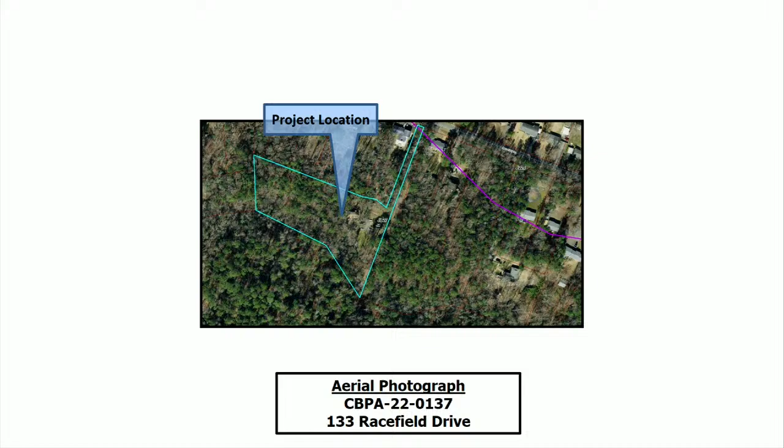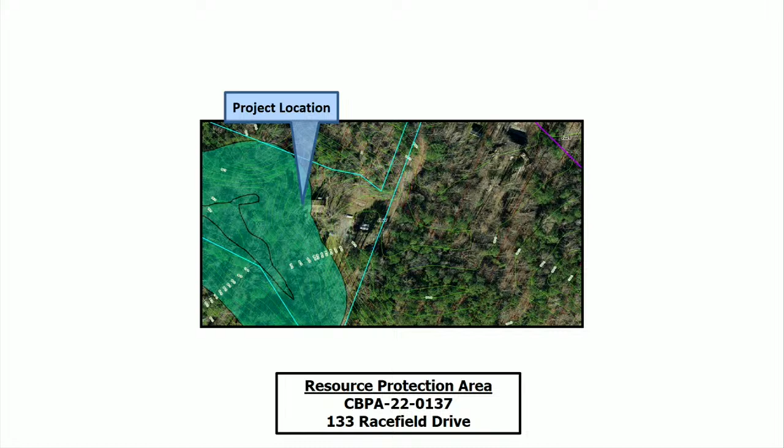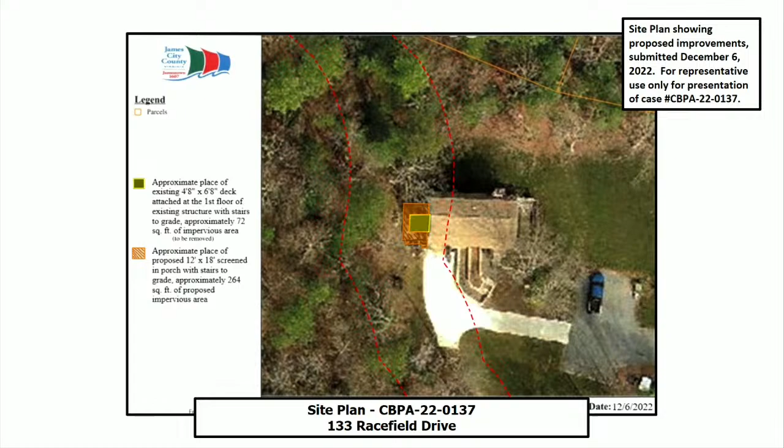The total lot size of this property is 2.91 acres, of which 74% is located within the RPA. The applicants are proposing to remove the existing deck on the side of the home and replace it with a screened-in porch. Here on the site plan, you can see the 100-foot resource protection area.

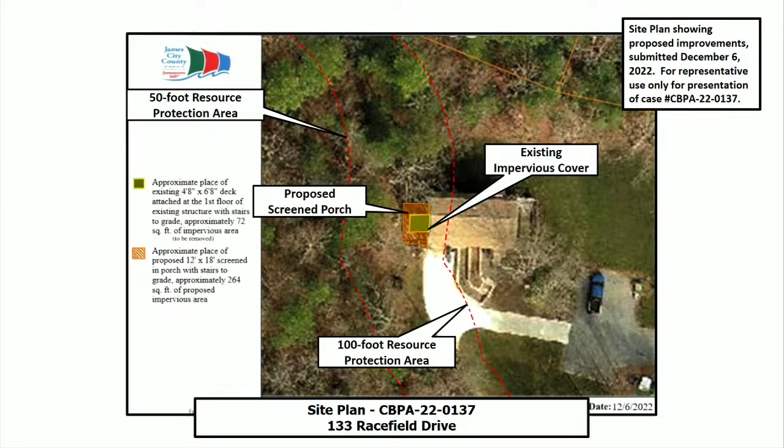The area in yellow is the existing impervious cover, or the existing deck on the property, and the area in orange around it is the proposed screened-in porch. The existing deck is 4 feet 8 inches by 6 feet 8 inches, and the proposed porch is 12 feet by 18 feet. Total existing impervious equals 72 square feet, and the proposed total impervious is 264 square feet. Therefore, total impacts associated with this proposal equate to 192 square feet of impacts to the landward 50-foot RPA. Required mitigation for this amount of impervious impacts equals 8 shrubs.

Staff has evaluated the application and exception request for the replacement of a deck with a screened-in porch. This application meets the ordinance conditions in sections 23-11 and 23-14 and should be heard by the board because the construction of a porch is considered accessory in nature. The board may grant exceptions to section 23-7 if the application meets the following 5 conditions.

The exception request is the minimum necessary to afford relief. Granting the exception will not confer upon the applicants any special privileges denied to other property owners in the vicinity. The exception request will be in harmony with the purpose and intent of Chapter 23 and is not of substantial detriment to water quality. The exception request is not based on conditions or circumstances that are self-created or self-imposed, and reasonable conditions are imposed which will prevent the exception request from causing a degradation of water quality.

Staff has reviewed the application and exception request and has determined the impacts associated with the proposal to be minor for the proposed development.

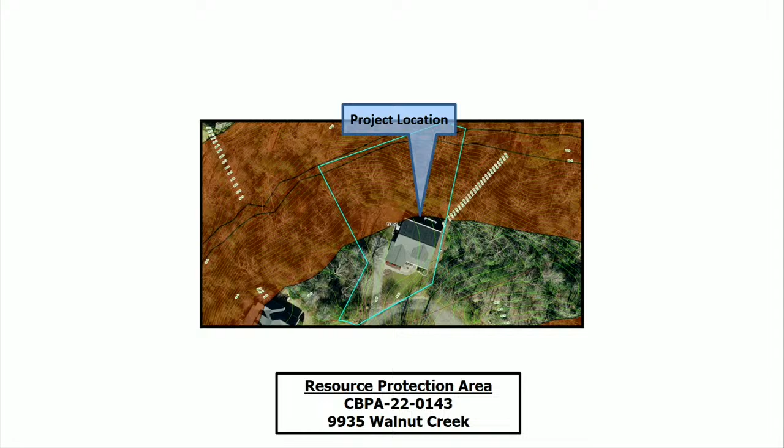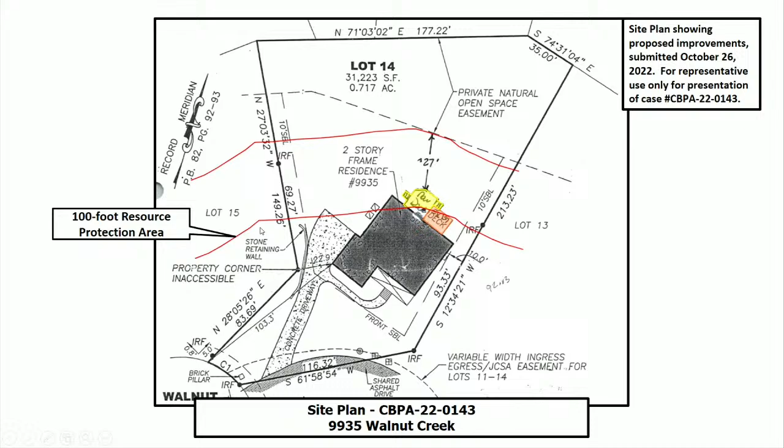This is further shown on the site plan above with the 100-foot resource protection area outlined here in red, the 50-foot resource protection area outlined here, the proposed deck in yellow, and the existing deck, which is proposed to be converted into a screened porch in orange. Required mitigation for this amount of impervious impacts equals 7 shrubs.

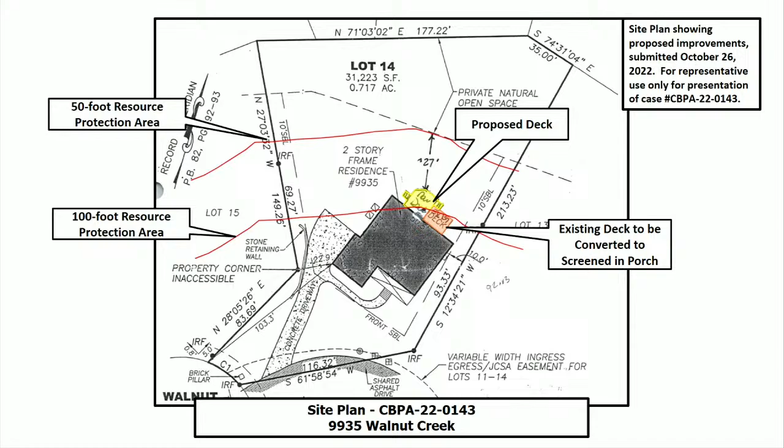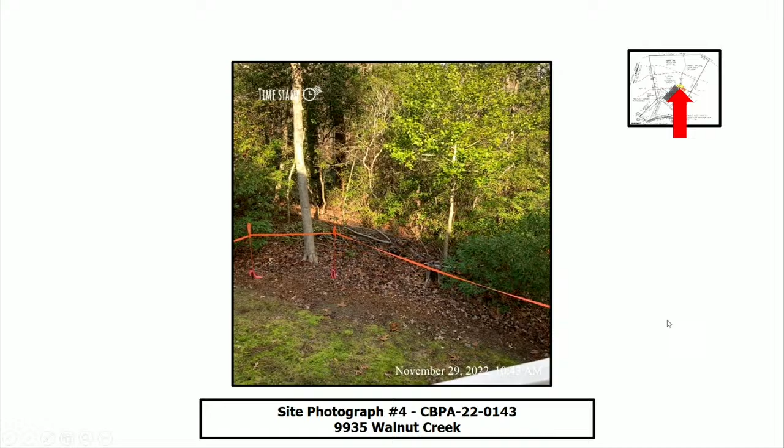Staff has evaluated the application and exception request for the construction of a deck. This application meets the ordinance conditions in sections 23-11 and 23-14 and should be heard by the board because the construction of a deck is considered accessory in nature.

The Board may grant exceptions to section 23-7 if the application meets the following 5 conditions: the exception request is the minimum necessary to afford relief; granting the exception will not confer on the applicant any special privileges denied to other property owners similarly situated in the vicinity; the exception request will be in harmony with the purpose and intent of the Chesapeake Bay Preservation Ordinance and is not of substantial detriment to water quality; and the exception request is not based on conditions or circumstances that are self-created or self-imposed.

Nor does it arise from conditions either permitted or non-conforming that are related to adjacent parcels, and that reasonable and appropriate conditions are imposed which will prevent the exception request from causing a degradation of water quality.

Staff has reviewed the application and exception request and has determined the impacts associated with the proposal to be minor for the proposed development. Staff recommends approval of this exception request.

If the board wishes to approve the request, staff recommends the following conditions be incorporated: that all other necessary federal, state, and local permits required for the project are obtained; that a mitigation plan equating to 7 shrubs be submitted to the Stormwater and Resource Protection Division and approved prior to the project start; that a surety of $500 be submitted in a form acceptable to the James City County Attorney's Office to guarantee these mitigation plantings; and the placement of 3 inches of gravel over filter fabric under the footprint of the deck.

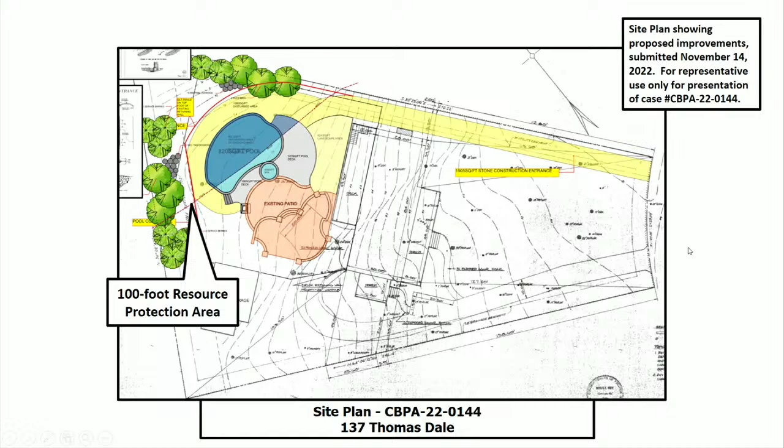This red line is the 100-foot RPA buffer. The darker blue is the area of the proposed pool and a little bit of the proposed pool deck that is within the RPA. The existing patio is shown in orange.

Required mitigation for this amount of impervious impacts equals the planting of 2.5 planting units, which is 2 canopy trees, 4 understory trees, and 9 shrubs. Some of that mitigation has been shown here behind the proposed pool.

I'd also like to clarify that on this site plan, the area of yellow surrounding the pool and coming up the side of the property is shown for the construction entrance and area that may be needed for construction vehicles for the pool.

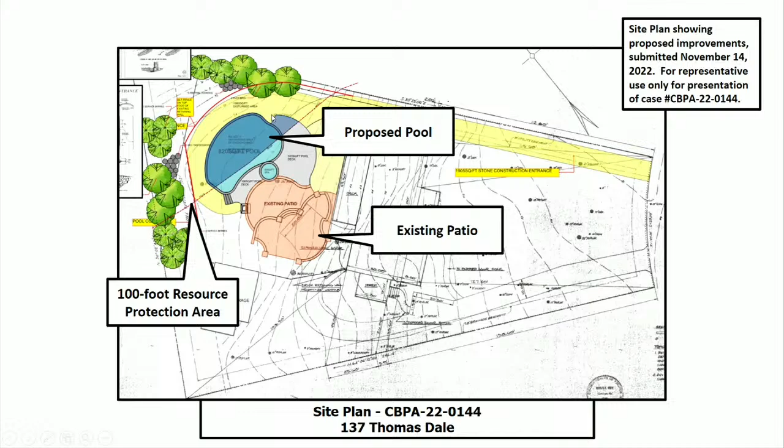Staff has evaluated the application and exception request for the construction of a pool. This application meets the ordinance conditions in sections 23-11 and 23-14 and should be heard by the board because the construction of a pool is considered accessory in nature.

The board may grant exceptions to section 23-7 if the application meets the following 5 conditions. The exception request is the minimum necessary to afford relief. Granting the exception will not confer upon the applicants any special privileges denied to other property owners in the vicinity.

The exception request will be in harmony with the purpose and intent of Chapter 23 and is not of substantial detriment to water quality. The exception request is not based on conditions or circumstances that are self-created or self-imposed, and reasonable conditions are imposed which will prevent the exception request from causing a degradation of water quality.

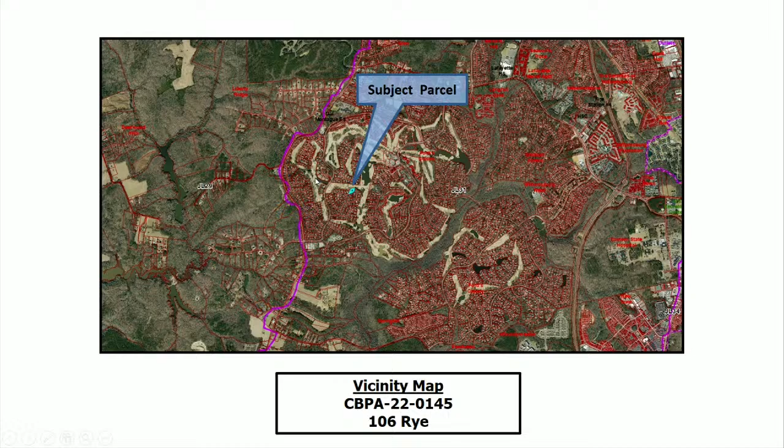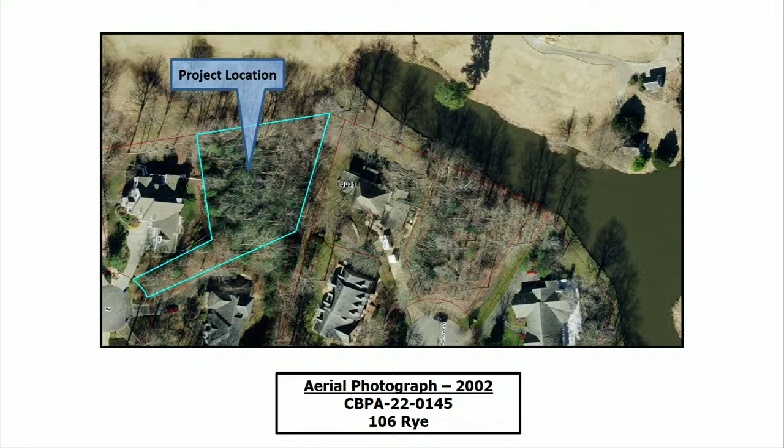It is a flag lot and is outlined here in blue. The topography of this lot is sloping in nature at the beginning of the actual flag and comes down into wetlands within the resource protection area.

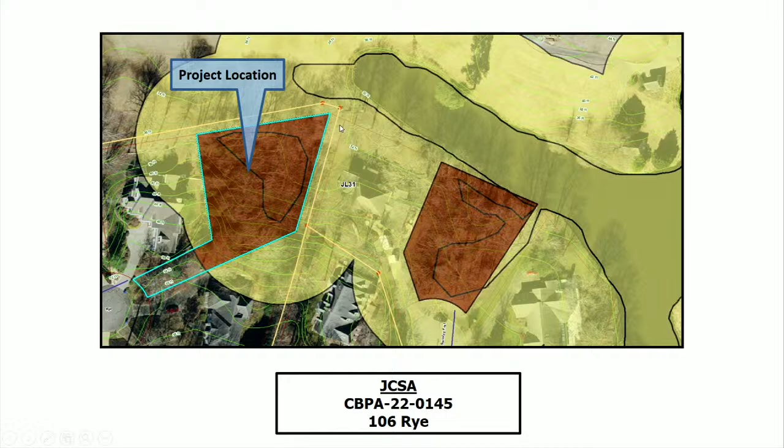These wetlands are connected to the pond that exists behind this lot via a pipe that is in this region here. There is a JCSA easement outlined here in yellow.

The drainage path that the water takes after leaving this property is as follows: it goes into a series of 3 BMPs before discharging to Powhatan Creek.

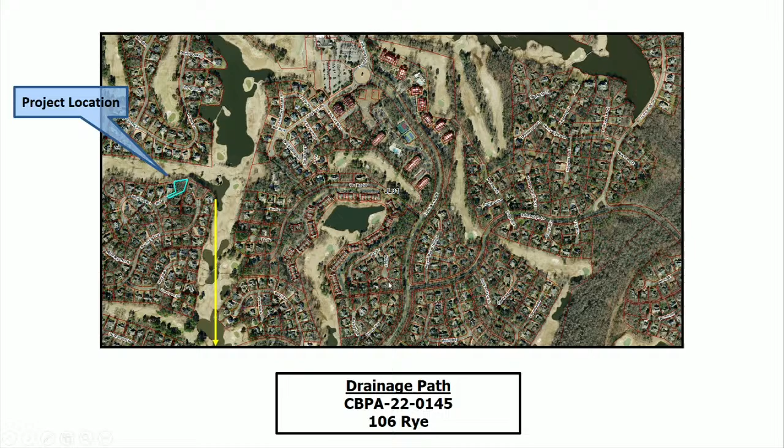It is notable the surrounding house sizes of this area. The average square footage of the properties is approximately 3,330 square feet.

The applicant is proposing to construct a single-family dwelling and 2 retaining walls, which equate to approximately 1,368 square feet of impacts to the landward 50-foot RPA and 2,156 square feet of impacts to the seaward 50-foot RPA, for a total of 3,524 square feet of impacts to the RPA as a whole.

Additionally, there are 1,000 square feet of impacts to the wetlands associated with fill. Required mitigation for this amount of impervious impacts equals 9 planting units, which equals 9 canopy trees, 18 understory trees, and 27 shrubs. At this time, no infiltration BMP has been proposed for this dwelling.

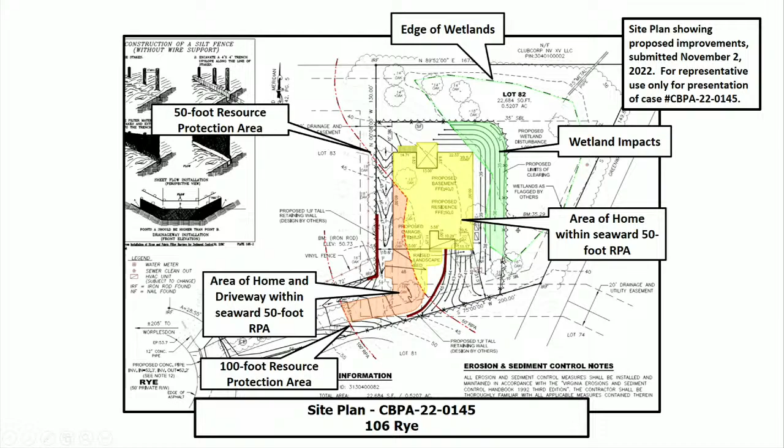The 2 retaining walls that are proposed for the construction of the driveway and house are here in red, and wetland impacts for fill are here in green.

The total square footage of the house itself is 2,220 square feet at the first floor elevation. Keeping this in mind in comparison to the houses around it.

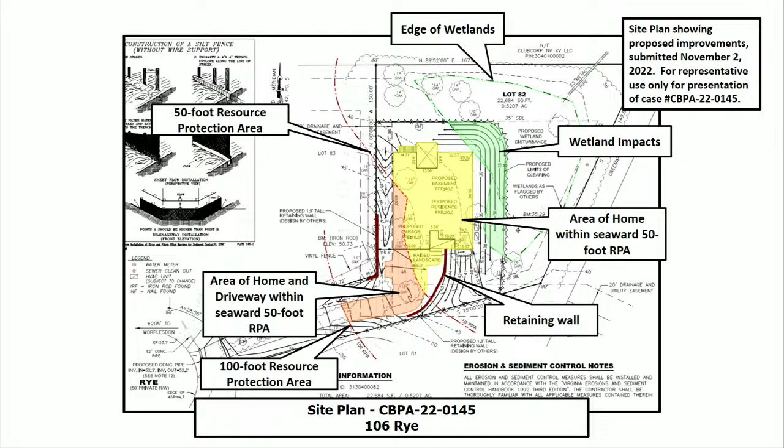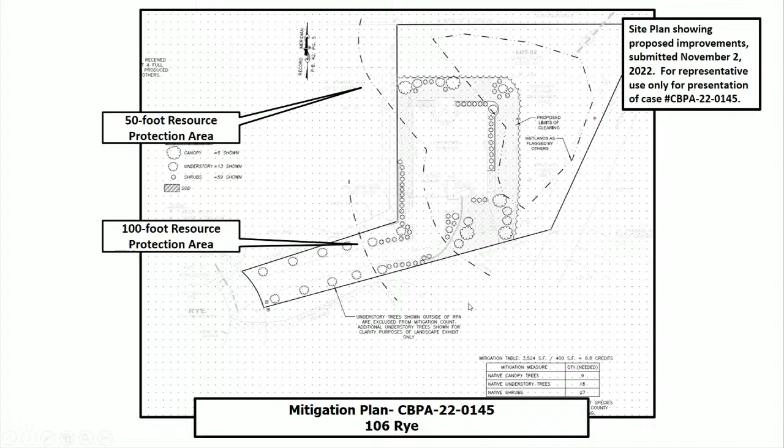Yeah, so I'm just curious, the 50-foot RPA, I understand where that's at on the project location, but where does that 50-foot RPA go in relation to the houses to either side of it? Sure. Following my cursor here, the 50-foot would approximately come through this region and then back up. And then on the northern side, just following in between these two lines here, just splitting this difference. Okay, so the house on the left is not in the 50-foot? More than likely not. If any of it is, it's likely the yard space. Okay, but the one on the right? This one would likely cut through within the 50-foot RPA.

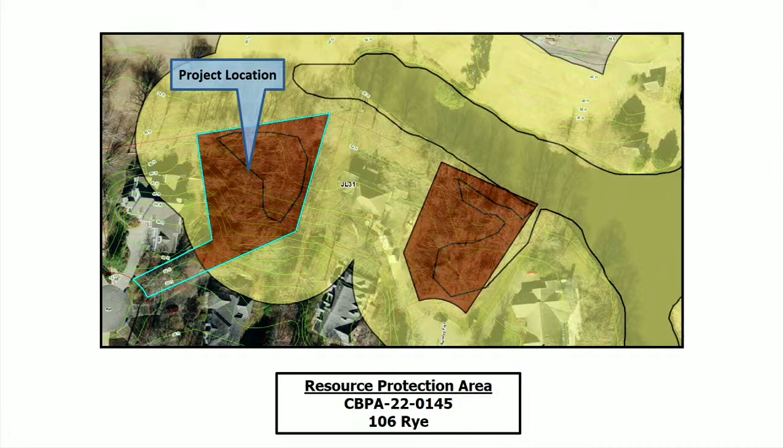One question, Trevor. Could you go back to the slide that shows the limits of clearing? Yes, sir. I just want to see that. Yeah, there you go. So these limits of clearing are this bubbled line here that makes this kind of square shape here. Thank you.

Any other questions for staff? If not, I will open the public hearing. Would the applicant or his agent care to address the board?

Good evening, members of the board. Chase Grogg with LandTech Resources, 205 Bulifants Boulevard, Suite E, Williamsburg, Virginia. Here to discuss 106 Rye. Thank you for your time this evening.

Just to go over a couple of the things that Trevor summed up. So yes, this house is sized to where it's less than the average house. As you can see from that map, there's a significant number of decently sized houses in the area that also have the same impacts within the buffer area. We tried to work with our client to reduce the size as much as possible to limit our impacts. It's a tough lot due to the topography on it. I know a couple of you went to the site, but it basically just slopes left to right all the way down to the wetlands. So there's not really a good spot to create some flat spots.

So that's the retaining wall on the left there along the property line, it's basically to hold the soil back from lot 83. Our flat driveway comes across, and then the retaining wall on the right is to support our driveway. We kept the grading as tight as we could. The only slight difference there is to try and prevent issues down the road.

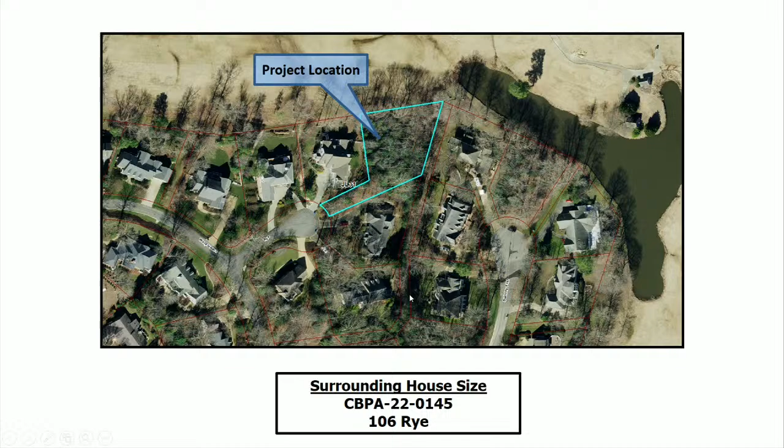There's already retention walls on the side of my property that would be adjacent to the driveway as it comes in. It sounds like there would be another retention wall that would either extend with mine as well. So that would be a concern.

So a request, if this is approved, my third concern would be obviously the size of the house in comparison to the other houses immediately around it. Lastly, a request that if this is approved, that we be afforded the opportunity to identify the trees on the property lines that we would like to remain.

Questions? Any questions for Mr. Adkins?

So the retaining wall that's on the driveway, your concern is that there's two of them, or that water from one would go to the other? So my retaining wall, is that how it's identified right there already? Yeah, that's your block wall that's pointed to there. And yours would extend off on that?

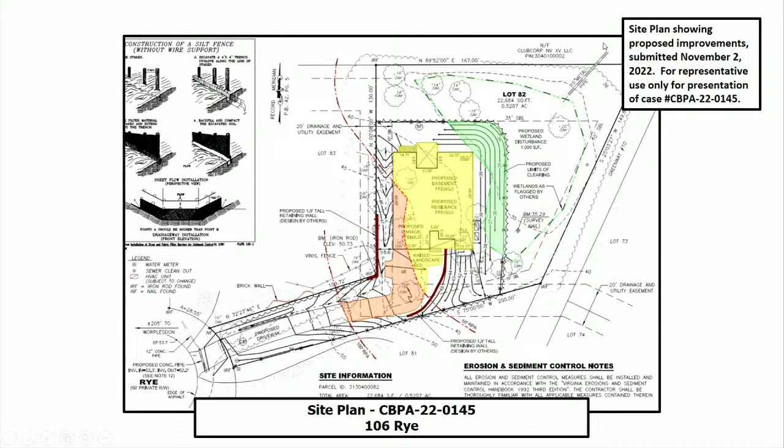Since this is a bowl, literally all this water—the greenway's higher, the golf course is higher, Lot 83 is higher, Lot 81 is higher—all of it goes to that metal pipe in the back and then into the BMP. You can't even see the pipe in the BMP because it's below the water grade or water level. Anyone else? Okay, yes, sir.

Hi, James Noren, 132 Swinley Forest, which is across the street from Gail. First, I'd like to confirm what she has said.

And I walk around that area, and you would never know there was a lot there. There really is no drive. I mean, the way it looks, there is no driveway there. It's just a little bit of a few trees. But as far as the lot itself, I think in most cases it would be considered unbuildable.

But I guess it was purchased for $35,000, basically on the idea that maybe they could do something with it. That is in addition to the house being a lower footprint and a lower value. The lot itself, the lot I live in, in 1991 was purchased for $270,000, which I'd say was a little bit of a bubble, but 31 years later, you're talking about a lot value and house value that doesn't really fit in with the neighborhood. And of course, we're all concerned about drainage in the area.

Thank you. Would anyone else care to address the board on this matter? Going once, going twice. All right, closing the public hearing. Matter is before the board. Is there any discussion from the board members?

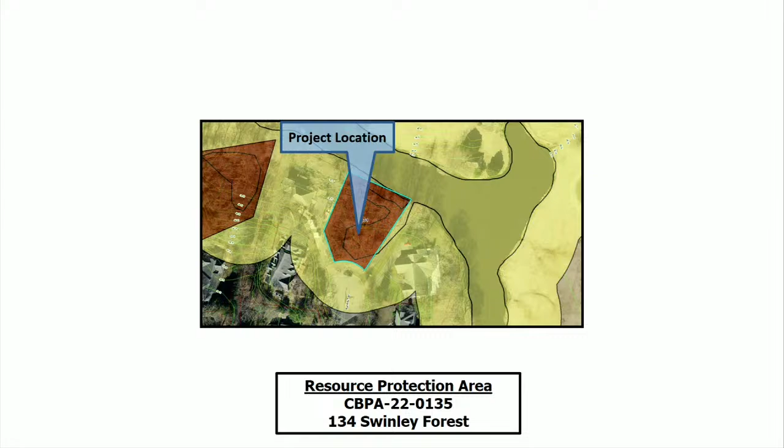The applicant is proposing to construct a single-family dwelling on the lot. The design of this two-story dwelling includes a two-car garage, a screened-in porch, and a driveway. These amenities above would be shown here in yellow. Again, this is the house, this is the driveway, and the screened-in porch is here in the back.

The 50-foot resource protection area is here in red. The limits of clearing are shown here in this dashed line. For the board's information, there is a maintenance easement back here in blue, and the limits of wetlands are here in green. This area here does show the overlap between the wetlands, the construction, and the limits of clearing.

Due to the constraints of this lot, the proposed house and driveway will impact both the seaward 50-foot RPA and the wetlands on the lot. Total impacts associated with the construction of the proposed single-family dwelling equate to 3,191 square feet of impacts to the seaward 50-foot RPA and 682 square feet of impacts to the wetlands.

This case was deferred from a previous meeting. During that time, it was deferred in order to amend the site plan and work with staff to minimize encroachments. During the time from the original deferral and now, the RPA impacts were reduced by 402 square feet, and the wetland impacts were reduced by 608 square feet.

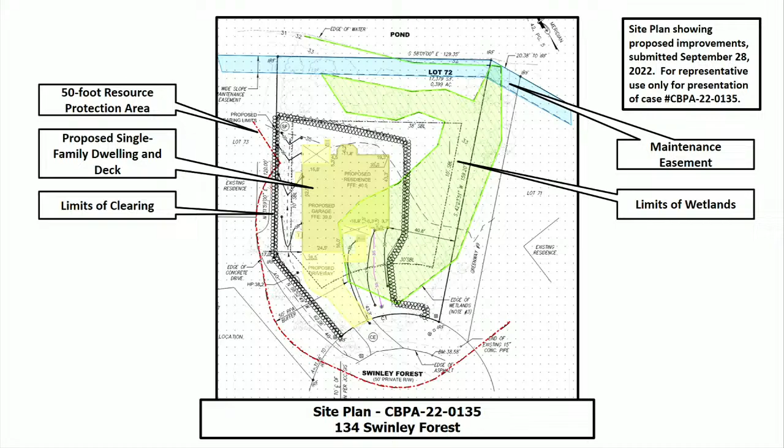Required mitigation for this amount of impervious impacts to the RPA buffer equals 8 planting units, which equates to 8 canopy trees, 16 understory trees, and 32 shrubs. At this time, no infiltration or other on-lot best management practice has been proposed, due to poorly drained soils located on the lot.

However, runoff from the development will either drain into a drainage easement and flow directly into the stormwater management pond located to the north of the property, or flow directly into the wetlands on the property that are subsequently attached to the pond. Similar to the previous case, this house is situated such that the drainage will flow through a series of 3 to 4 BMPs before discharging into the Powhatan Creek watershed or creek system.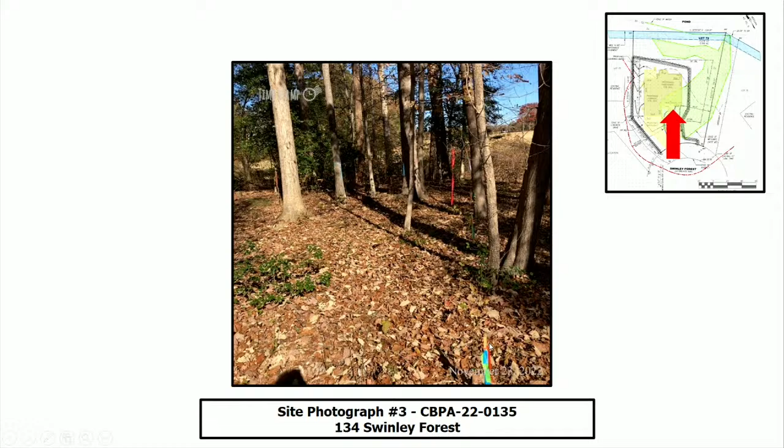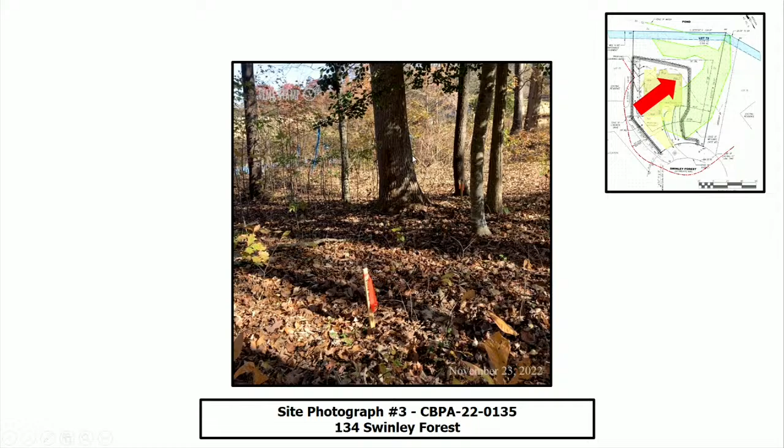The furthest right property or house corner here, again in orange, through this thicket of trees or vegetation, you can see the pond that this backs up to. And the far left house corner here in orange.

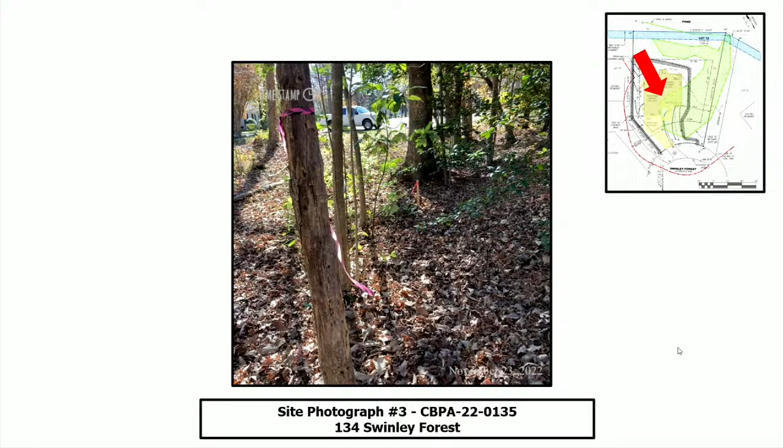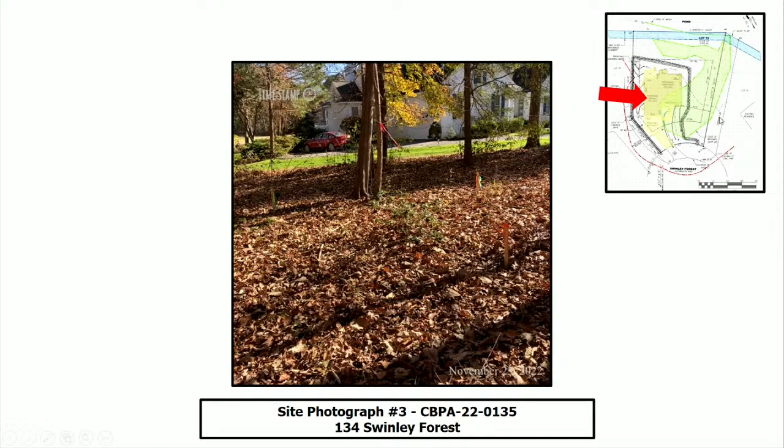Looking back towards the wetlands and also back towards the street. And looking towards the drainage easement or the maintenance easement that runs along this side of the house, which captures much of the water draining to the east of this property.

One last thing, similar to the previous case: the average square footage of the surrounding houses is 3,300 square feet. Just wanted to give the board information that the proposed dwelling meets that and is also at 3,300 square feet.

It is comparable to the average of these surrounding houses. Staff has evaluated the application and exception request for the construction of a single-family dwelling. This application meets the ordinance conditions in sections 23-11 and 23-14 and should be heard by the board because the construction of the single-family dwelling extends into the seaward 50-foot RPA.

The board may grant exceptions to section 23-7 if the application meets the following five conditions. First, the exception request is the minimum necessary to afford relief.

Granting the exception will not confer upon the applicant any special privileges denied by Chapter 23 to other property owners similarly situated in the vicinity.

The exception request will be in harmony with the purpose and intent of Chapter 23 of the James City County Code and is not of substantial detriment to water quality.

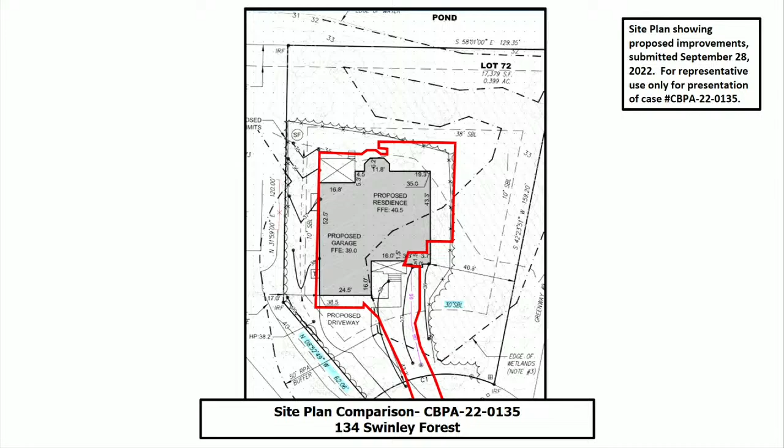The stormwater will flow through the 3 established BMPs shown on the plan. These were designed and installed as part of the original subdivision and were designed to take into account the runoff from this lot. So all 3, or actually 4 - there's a 4th one here, this little small one - any runoff from this lot will go through the 4 BMPs, which, as Larry said earlier, is kind of unusual to see, and I laughed because we've got one right next to it. The stormwater will come off this lot and filter through all of those, so there will be no sedimentation or anything going into Powhatan Creek where it actually outfalls.

In looking at the designs on this house, we looked at it as a flipped around design, turning it again as I discussed. The design we came up with was the least environmentally damaging alternative. By turning or flipping the house, you ended up with more wetland impacts, which is undesirable.

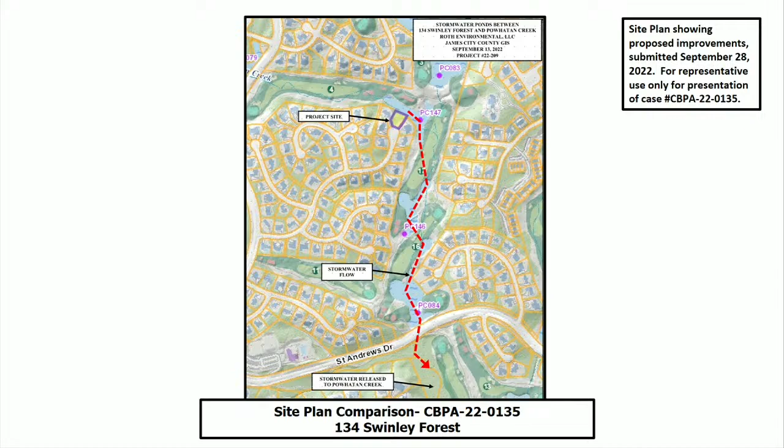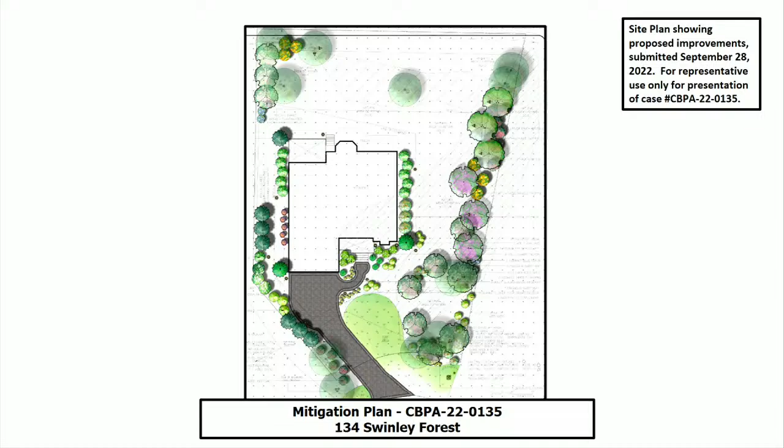Our mitigation for our proposed construction will be: one, wetland mitigation - because this is in Ford's Colony, we will be mitigating for those wetland losses. We'll also be doing our Chesapeake Bay mitigation, which, as Trevor said, will be 8 units. Because of the environmental sensitivity of this lot and the wetlands on it, the applicant in the original design said he's more than willing to go ahead and purchase 4 units, or half the mitigation, into the James City County Mitigation Fund. As we moved along with our landscape plan, we were able to get 13.5 units on the total lot.

That 13 and a half units, Mr. Williams with Williams Landscape will discuss in a minute. But of that 13 units, 6 and a half will be within the clearing limits. So we're going to have 4 units purchased, and then 6 and a half units within the clearing limits. Most of those will be shrubs, and we've got an understory tree. It equates to 1 understory tree and 71 shrubs within the clearing limits. There will also be 3,415 square feet of mulch.

We've also recommended that they enroll in the Turf Love program. Even though it's a small yard, there will be a small area of grass out there in the street, which will teach the applicants how to establish a healthy lawn without the need for heavy fertilizers and pesticides. I hope this helps you see the willingness the applicant had in reducing the footprint of the house. We've worked hard with staff here at the county and with the applicants and their engineers to come up with the plan, and I'm happy to answer any questions.

Any questions for Mr. Roth? I think the requirement was 8 planting units. It is 8, so it'll be 10 and a half total. Does that include the fund contribution? That would include it, I'm sorry.

Yeah, okay. Since we did our topographic survey, they actually did some work in the front there to kind of fan it out more, but basically it just comes under the driveway to the left and there's not very much of a swale there. The greenway is where it's supposed to go, and since it's their maintenance easement, they can cut a ditch all the way to the pond. Apparently it's not 100% effective because it seems like the drift of the water is left to right and doesn't even get sent down that greenway.

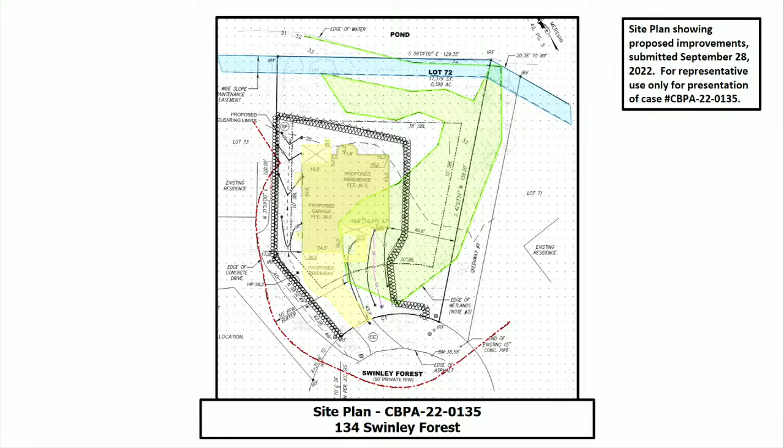Is that what I'm hearing? But that's not necessarily a lot issue, that's a community issue. It's not a buffer issue. Basically, the ditch in front of this property is non-existent. So you have water coming down both sides of Swinley Forest, it comes around the cul-de-sac, and Ford's Colony's ditch is not very deep. During a good storm, it comes right onto the lot, and as you can see, the lot is sloped left to right, so it's all headed to the back right corner.

Just at the moment, a potential approval of this project would help relieve some of the concerns that our house would flood, it sounds like there's a concern for you. Yes, sir. The BMP pond that's directly behind these homes, I don't know the top elevation water off the top of my head, Mr. Wood, but the contours back there are 31, 32, so it's about 3 feet.

In relationship to the road cul-de-sac, what is the relationship to the top of the BMP pond's ability to drain to that? Show the contour. I'm trying to read what that benchmark says. It would appear to me that benchmark says 38. So there's about 3 feet of fall from the cul-de-sac, or actually more than that. Our contours back there are 33, 32, it's basically a bank, so there's probably about 6 feet of fall.

Sounds like to me it's a grading problem. It's a grading problem, Ford's Colony, that's the reason the neighbors are having the problem. Yeah, and not to keep bringing up Walton Heath, but that's one that at least a couple of you are aware of, where there was a greenway that the developer never put a ditch in, and that's most likely what happened here. Maybe that ought to be addressed. I would think the homeowners would be...

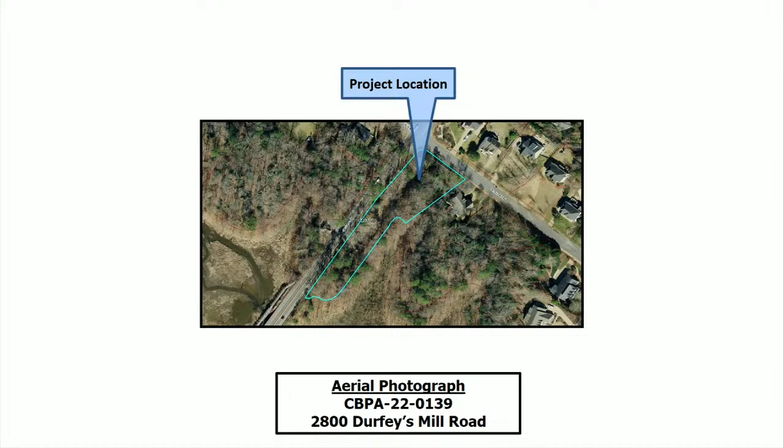This is within the Durfey's Mill subdivision and the Mill Creek watershed. You can see the parcel outlined in blue here. The parcel was platted in 1998 after the adoption of the Chesapeake Bay Preservation Ordinance in 1990. Here's aerial photography of the entire site, and zoomed in closer to the actual location of the proposed home.

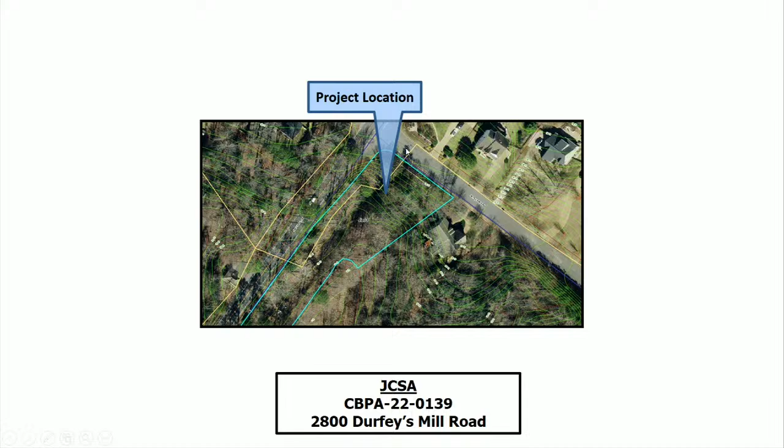Here's the topography at the site. Starting at the road, it's a fairly semi-steep drop down until you hit the wetlands and the back portion of the lot. There are JCSA easements shown in yellow here, and the resource protection area.

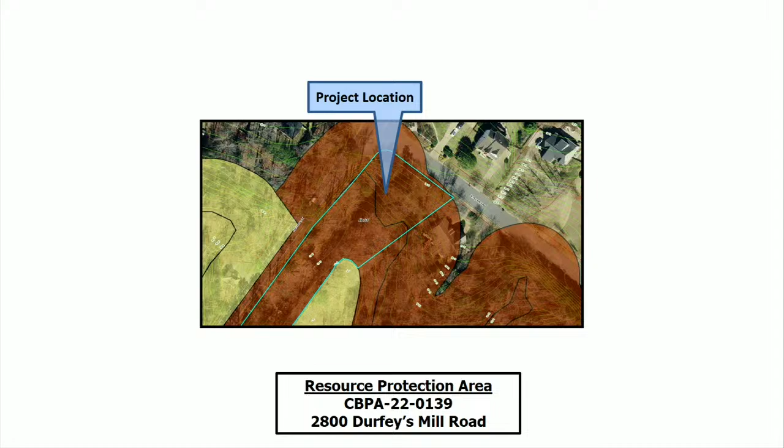The total lot size of this property is 0.692 acres, of which I think that number needed to be updated, more like 100% of the property is within the RPA. My apologies. The applicant is proposing to construct a single-family dwelling.

Total impacts to the RPA associated with this proposal equate to 1,052 square feet of impacts to the landward 50-foot RPA and 2,301 square feet of impacts to the seaward 50-foot RPA, totaling 3,353 square feet of impacts.

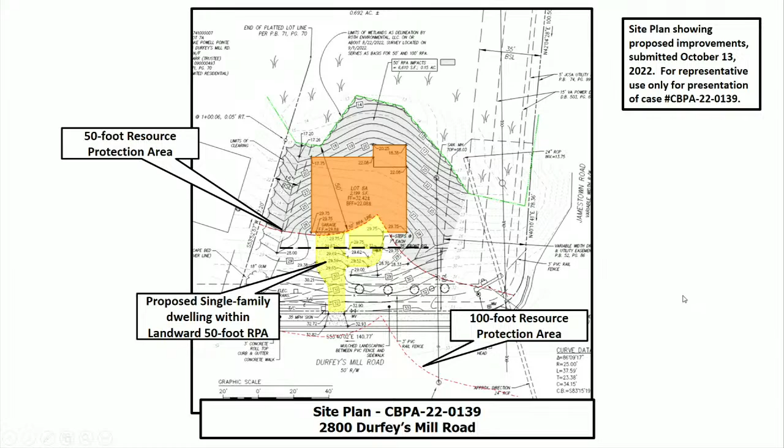On the site plan above, you can see the 100-foot resource protection area out in the middle of the street, and the 50-foot resource protection area up here. In yellow is the area of the driveway and the house within the landward 50-foot RPA, and in orange is the area of the home within the seaward 50-foot RPA. In the back here in green, we have the edge of wetlands. This gray area between the house and the wetlands is the limits of clearing, which does back up all the way to the wetland line.

And this black line here up front, that is the front building setback line. So you can see there's about 5 to 10 feet of space between the beginning of the home itself and the front setback line.

Required mitigation for this amount of impacts: impervious impacts equal 8 planting units, which is 8 canopy trees, 16 understory trees, and 24 shrubs. No infiltration measures have been proposed at this time because of the proximity to the wetlands and the subsequent soils. And the wetlands on this property are non-tidal and therefore outside the jurisdiction of the local wetlands board, so no wetland impacts are proposed at this time.

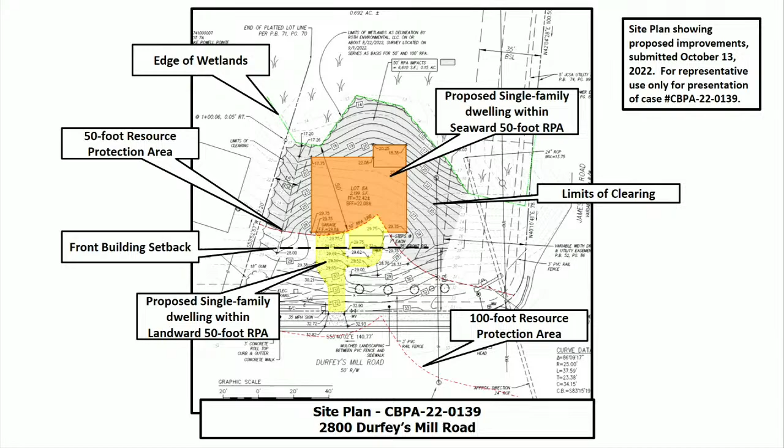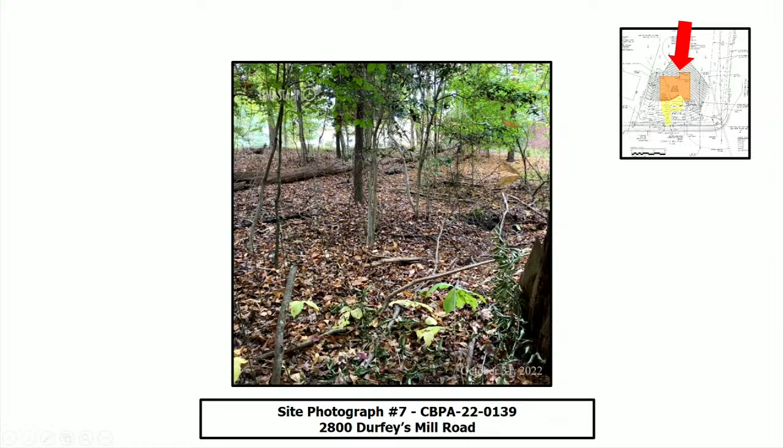Looking back again towards the wetlands, further back in the property, here is a mark for the JCSA easement. The white was the limits of clearing towards the back of the property against the wetlands line and wrapping around the corner. And then looking back up the lot at the street.

Staff has evaluated the application and exception request for the construction of a single-family dwelling. This application meets the ordinance conditions in sections 23-11 and 23-14 and should be heard by the board because the construction of a single-family dwelling extends into the seaward 50-foot RPA. The board may grant exceptions to section 23-7 if the application meets the following 5 conditions.

The exception request is the minimum necessary to afford relief. Granting the exception will not confer upon the applicant any special privileges denied to other property owners in the vicinity. The exception request will be in harmony with the purpose and intent of Chapter 23 and is not of substantial detriment to water quality. The exception request is not based on conditions or circumstances that are self-created or self-imposed, and reasonable conditions are imposed which will prevent the exception request from causing a degradation of water quality.

Staff has reviewed the application and exception request and has determined the impacts associated with the proposal to be major for the proposed development. Staff recommends denial for this exception request. It has not been shown to be the minimum necessary to afford relief.

However, if the board wishes to approve the request, staff recommends the following conditions be incorporated into the approval. The applicant must obtain all other necessary federal, state, and local permits as required for the project. A mitigation plan equating to 8 planting units must be submitted to the Stormwater and Resource Protection Division and approved prior to the project start.